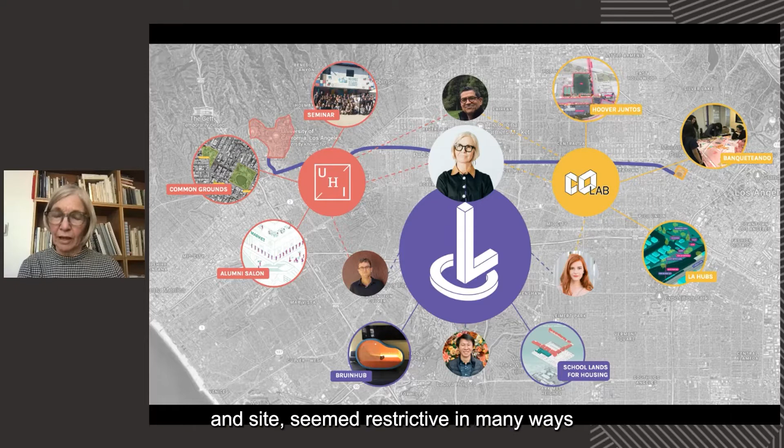After working for 15 years out of the campus lab and site, that seemed restrictive in many ways. Because we're now really deeply embedded with community-based partners, we started in 2019 something called CoLab, where we have long-term partners of various community institutions with whom we undertake our research.

I should say that all of the research cityLAB undertakes, unlike a community design center, is initiated by us as we look at what the pressing problems are that are spatially and urbanistically given, and where we really feel design can operate as a lever to explore new solutions. So all the work we do is really very much what I would call design research.

Our laboratory provides us plenty of opportunities to think about affordable housing. Just in these simple graphics and data points, you can see that California, of the 50 states in the United States, is by far the most unaffordable. More people are cost burdened by the cost of housing.

I know Australia, and Melbourne in particular, has similarly horrifying figures, but the median house price in California, the entire state, is now over $800,000, and that's twice the national level. So there's no place like California where affordable housing is as egregious a problem.

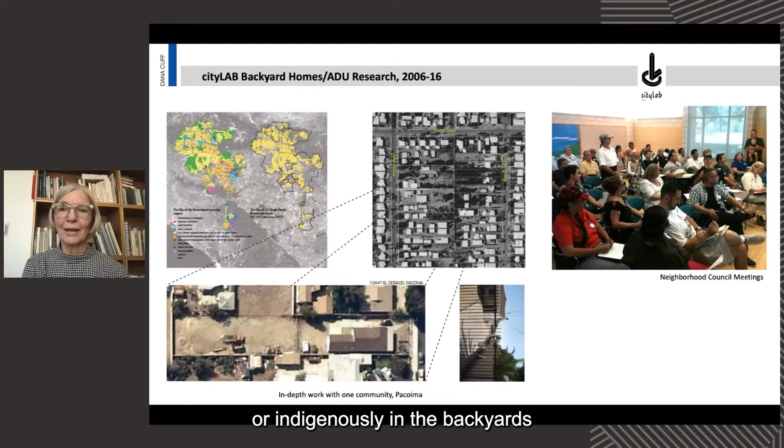So in thinking about how to provide affordable housing through new mechanisms, we realized that there was already a form of affordable housing that was occurring naturally or indigenously in the backyards across the vast residential landscape of LA.

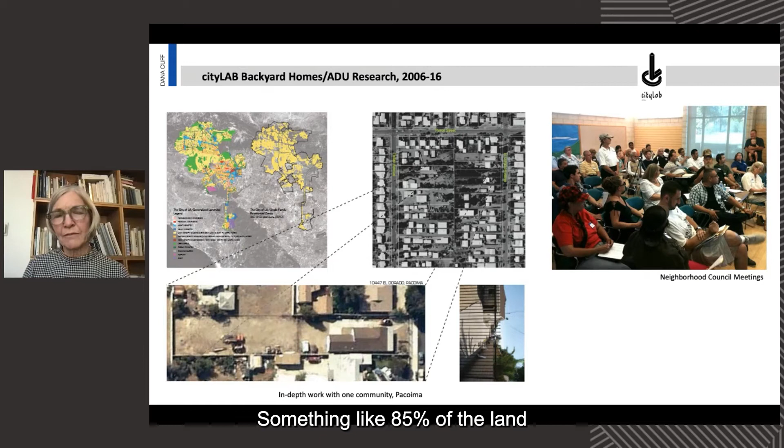You can see on this map at the left that kind of lamb chop shape going down in a small narrow band from the massive land use cluster at the top is Los Angeles, and the yellow is all residential. Something like 85% of the land in Los Angeles is residential, and most of that, by far, the lion's share, is zoned single family.

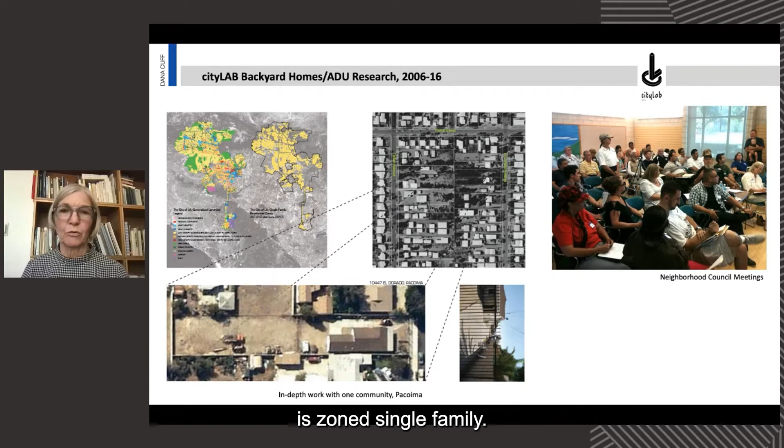So for 10 years, as the top of the slide banner indicates, we undertook a range of research projects to better understand both how this naturally occurring affordable housing was happening and what was restricting it from developing further.

It turns out that it was all illegally built, informally built, and that means that there was a huge need for it because people were placing labor into the construction of buildings that couldn't be converted necessarily into land value upon the sale of their property.

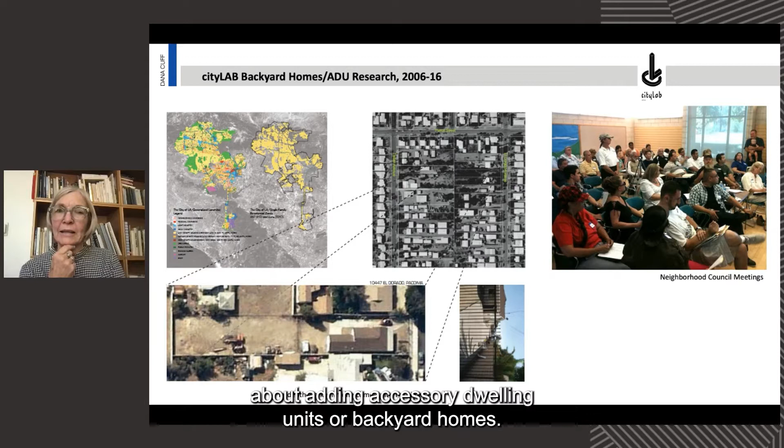You can see in this upper center slide where we began working in what we would call the low-hanging fruit, or the easiest places to begin thinking about adding accessory dwelling units or backyard homes. This is an area called Pacoima in Northeast Los Angeles County, zoned for agricultural land, and the properties there are immense—50 to 75 feet wide and as much as 350 feet deep.

You can see in this aerial that though that was originally planned for domestic agriculture or farm animals, now what's happening in the backyard is the addition of multiple units. So many of them have 3 units behind the original house.

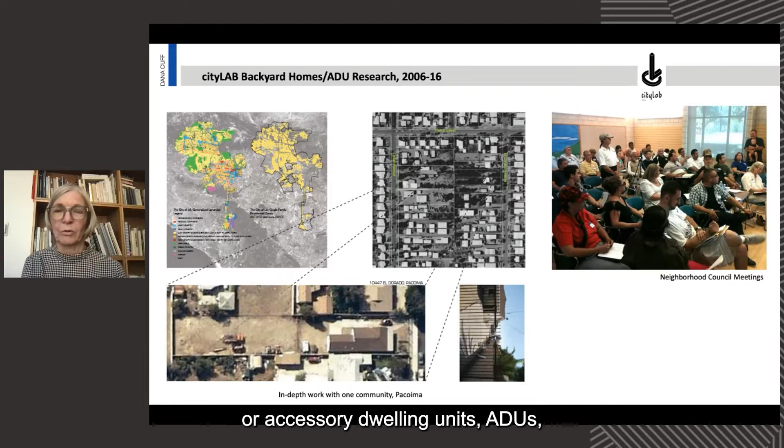We thought if we started where it was easiest to imagine adding secondary units or backyard homes or accessory dwelling units, ADUs, we might begin to unlock the DNA for the rest of the city.

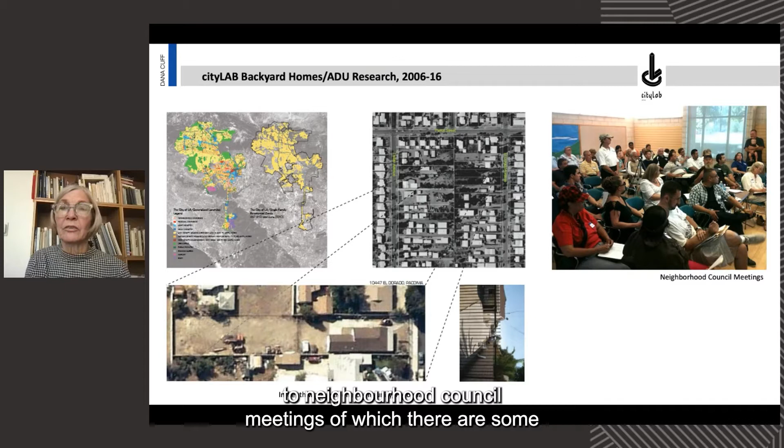Part of our research was related to neighborhood council meetings, of which there are some 100 neighborhood councils, almost all of whom vocally are unsupportive of a policy change to add secondary units, but many of whom have secondary units in their own backyards. If you're curious about that, we can talk about it in the question and answer period.

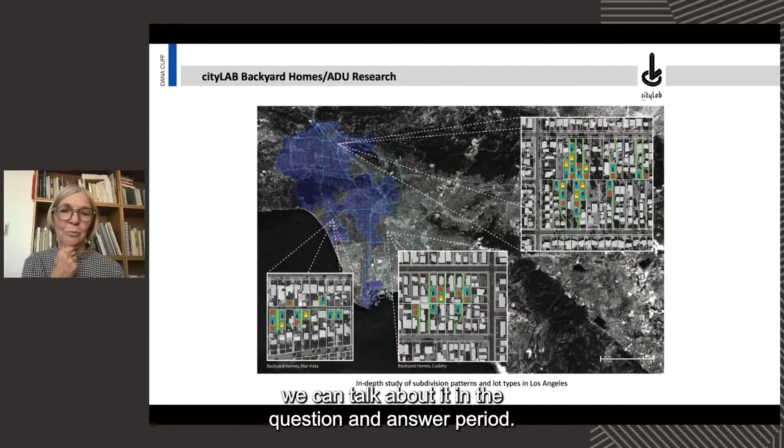One of the things we discovered was that there were lot types, property types in Los Angeles that would afford different circumstances for ADUs. There's a myth in Los Angeles, I suspect these kinds of myths exist in many cities, that there's a standard lot here. The thought is that it's a 50 by 150 foot lot. But in fact, that's not even the median lot. There is no standard lot.

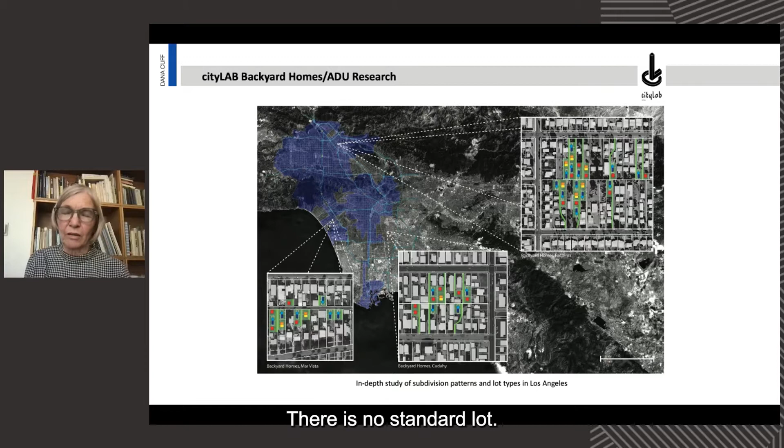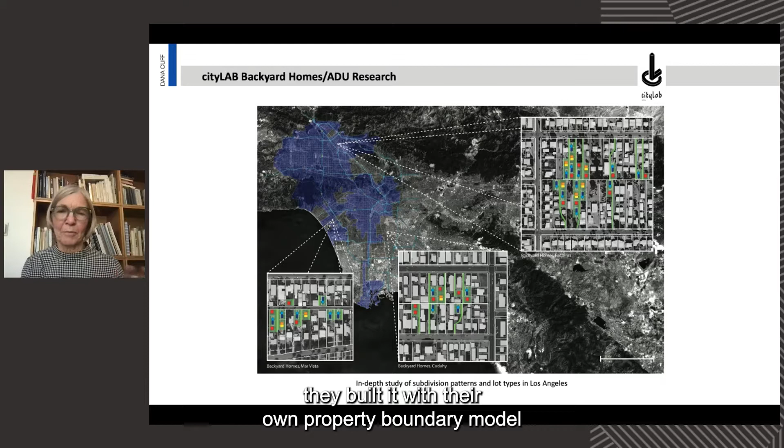It's really like a series of thumbprints, in part because as developers built the suburban fabric, they built it with their own property boundary model or pattern. And then people's additions to their houses have changed the buildable areas that remain.

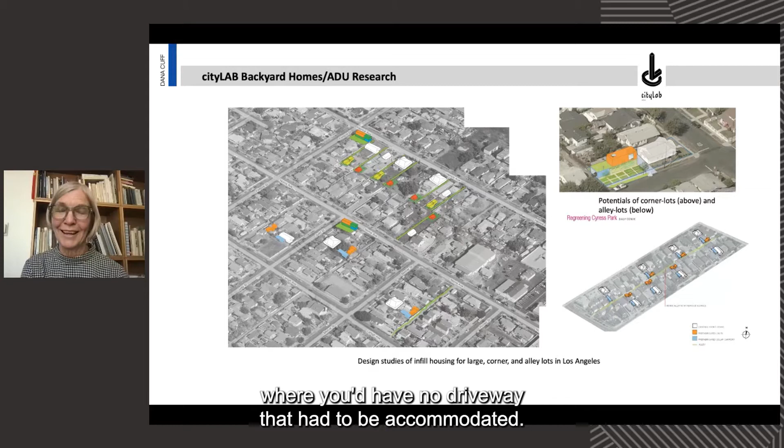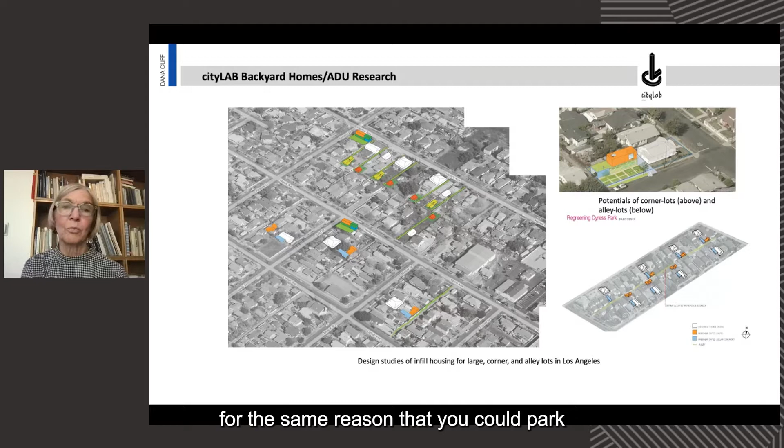So when we were working at a local level, we studied all the different types of lots where secondary units would be most easily accommodated. That was the large lot, like we saw in Pacoima, a corner lot where you'd have no driveway that had to be accommodated, so we'd have more of the lot to take up with housing rather than cars, and alley lots for the same reason, that you could park over a back garage and build a house on top. There are 900 miles of alleys, and I know almost everything there is to know about the possibilities of secondary lots, secondary houses in Los Angeles.

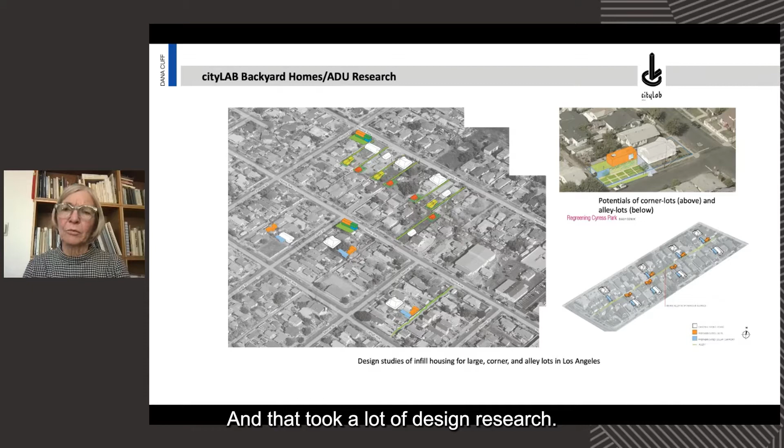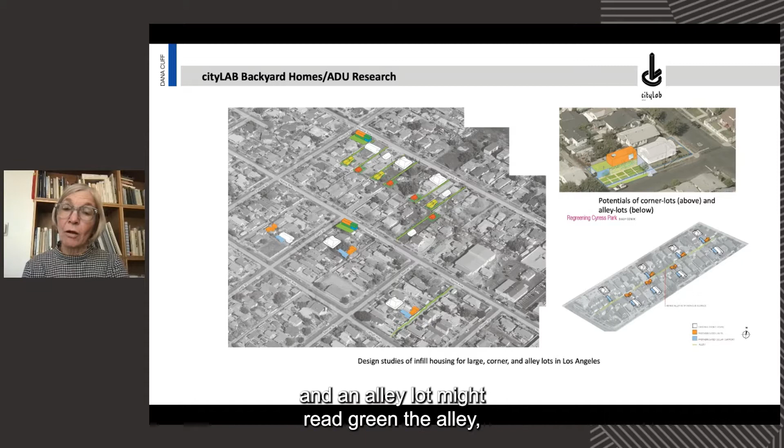That took a lot of design research. We then thought we would propose locally different kinds of secondary units that would benefit the community, that this might be a way of gaining political support from the local city council. So a corner lot might give something back, a little library, a bench, a shade tree, a plant nursery, and an alley lot might regreen the alley, make it a safer place to live, add lighting.

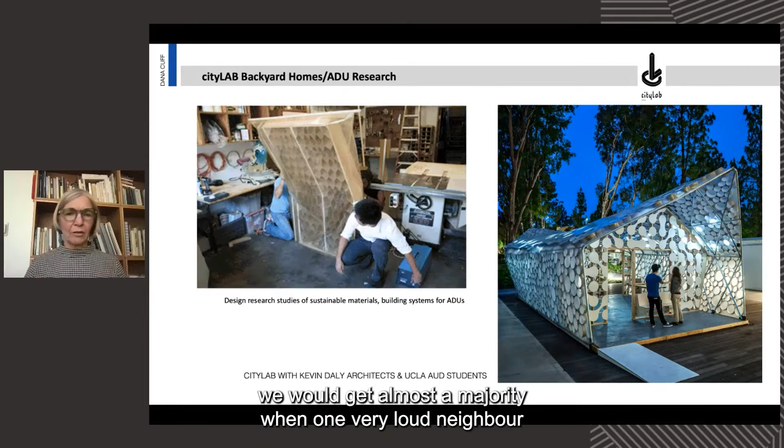At each stage, with our city council members, we would get almost a majority when one very loud neighbor in one district would come forward and convert the support into a contradiction or contrary position, and we'd lose the vote. And we never were, in 10 years, able to pass legislation locally.

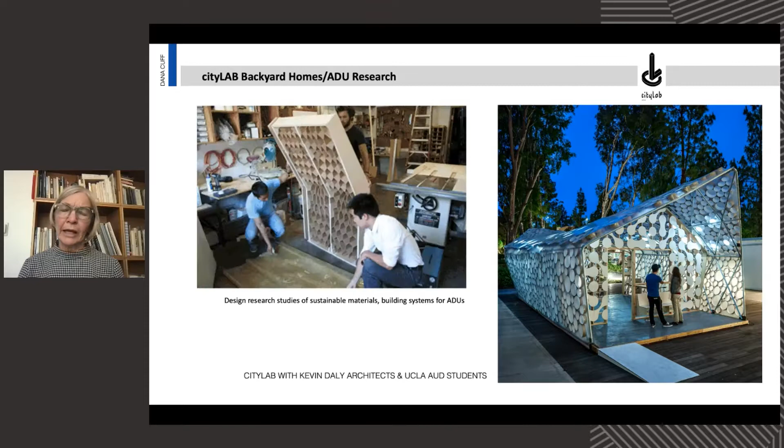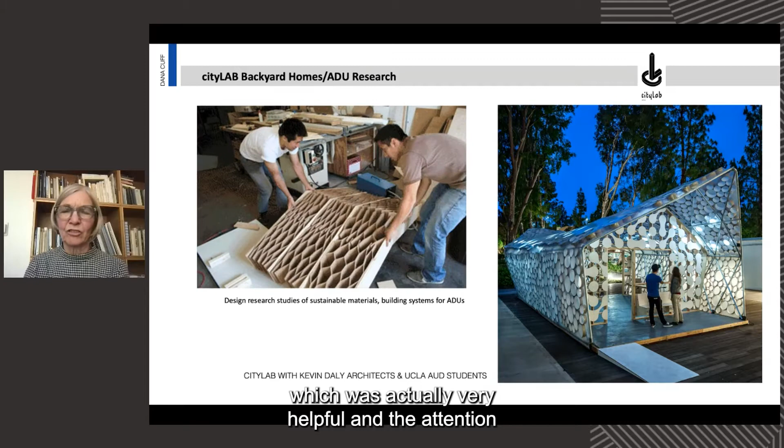This is just another instance of our design research. We were trying to build secondary units that would be highly sustainable. We built a full-scale mock-up. This was undertaken with Kevin Daly, architects, and architecture graduate students at UCLA. This got us a lot of publicity, which was actually very helpful, and the attention of our local congressman, who invited me to help co-author legislation for ADUs, accessory dwelling units, at the state level.

Knowing as much as we did basically about the Los Angeles case, I'll let this little video play for a moment since it has a soundtrack.

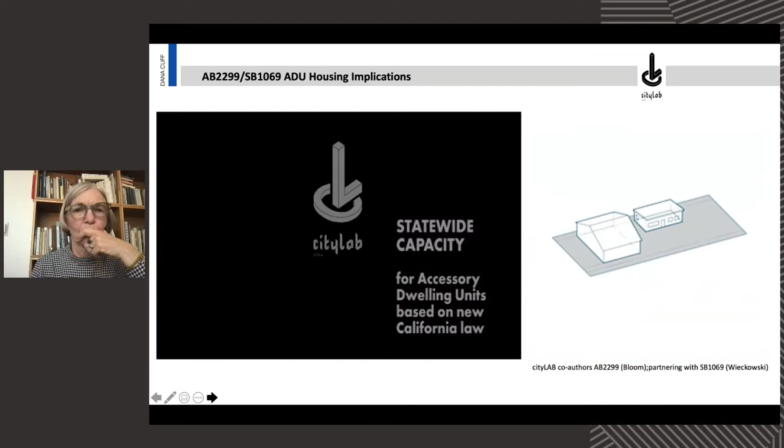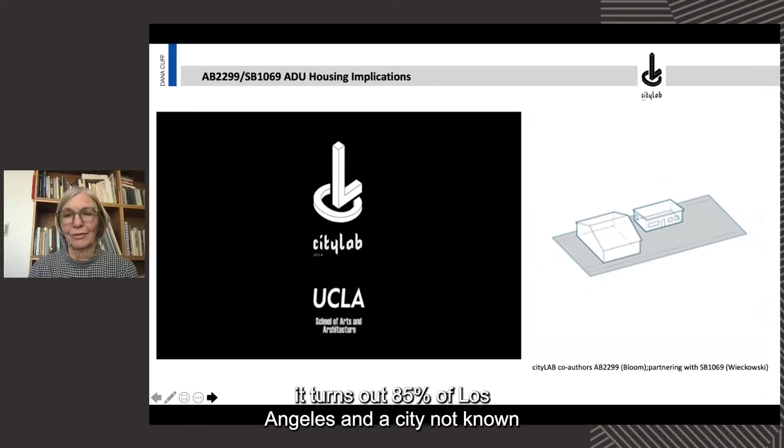We co-authored a new law, AB 2299, that at the state level incentivized rather than constrained the development of secondary units by removing parking requirements for any property within a half-mile radius of a frequent transit stop. It turns out 85% of Los Angeles, a city not known for its public transportation, is within a half-mile radius, so most properties don't need to place any parking on the site.

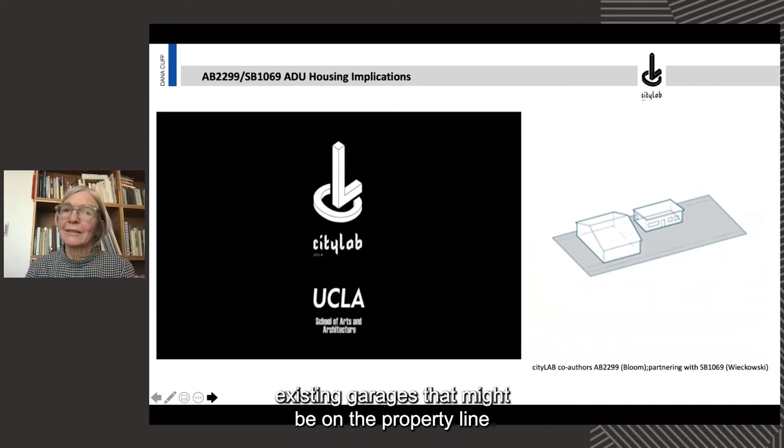Secondly, you could grandfather in existing garages that might be on the property line and build above them, so that there wasn't the need to demolish what might already be informally used as affordable housing to add new housing. All of this together made for an extremely successful bill that's had tremendous effects on the production of secondary units.

As a demonstration of cityLAB's multiple tentacles into the production of affordable housing, we discovered that even planning departments didn't understand how to apply the new legislation during the first year. So we also wrote a guidebook that's been published over and over online and in hard copy to help both planning departments and homeowners figure out how to build an ADU, because there still are kind of arcane legislative components.

We found in further research that 55% of those ADUs that are built are rented below market rate, so there is a good contribution to affordability. You can see from the chart on the left, when the law was written, there was a very restrictive law that was on the books prior to 2016. In the very first year that the law made ADUs legal under our new guidelines, in California, 5,000 permits were issued.

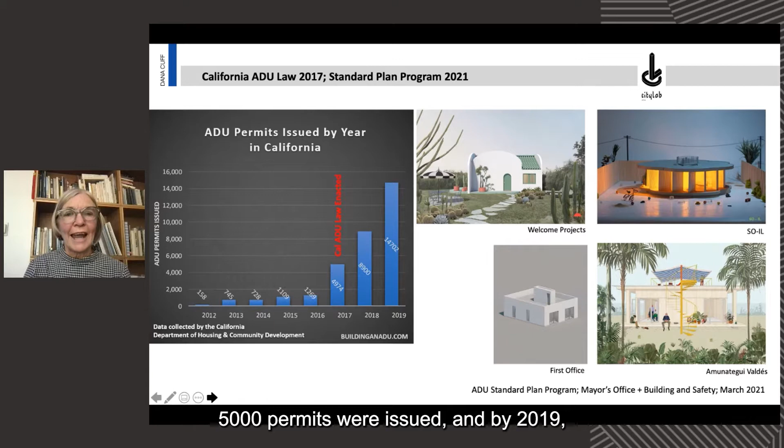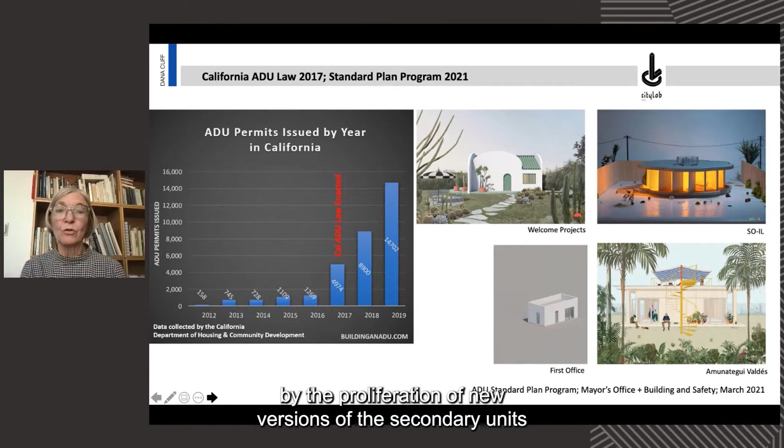And by 2019, that number had almost tripled. In some ways, I'm actually even more pleased by the proliferation of new versions of the secondary units, or backyard homes, that has occurred since the ADU law we co-authored passed.

One of those is something called the Standard Plan Program that the Los Angeles Mayor's Office issued. It was something we looked at extensively during our 10 years of research: could we develop a set of secondary unit plans that could be pre-approved by the Building and Safety Department, reducing the cost to homeowners and the timeline, which is a large part of the cost of building a housing unit? The mayor's office invited 15 architects initially to submit plans, which the building department approved.

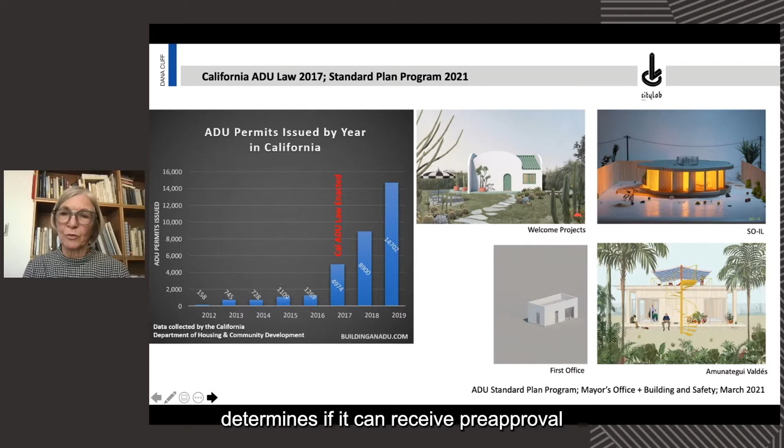I'm just showing you 4 of those. Now any architect who is interested can submit a plan to the Standard Plan Program. The building department reviews it, determines if it can receive pre-approval, and it's accessible to homeowners who might like to try a version, which would have to be tailored to their own backyards.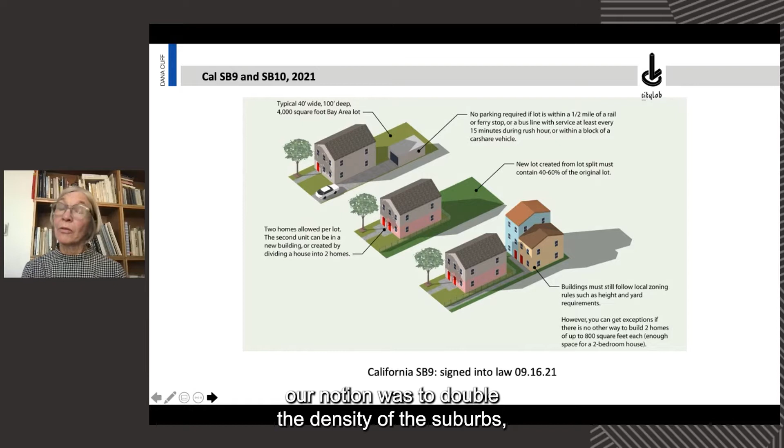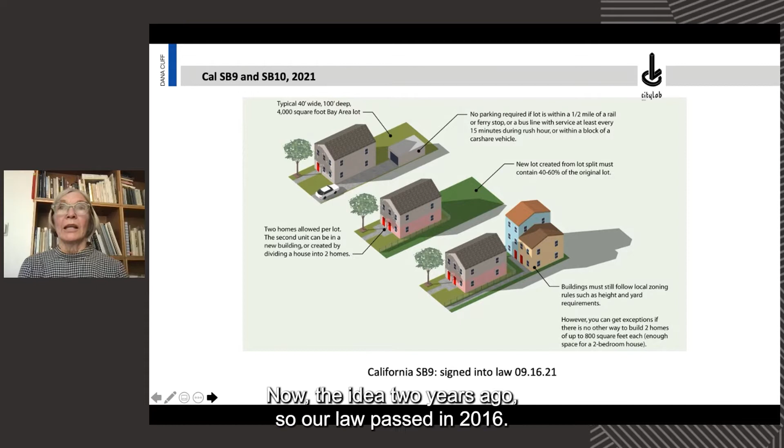Another, even more exciting aspect of the ADU law is that our notion was to double the density of the suburbs, which when we started talking about that in 2006, was a kind of heresy in Los Angeles. Now, the idea—2 years ago, our law passed in 2016, it became law January 1st, 2017.

By 2019, you could have another unit on the site with a revision to our law that introduced something called a junior ADU. In other words, you could carve a small unit out of an existing house in addition to adding a new accessory dwelling unit. So you could actually have 3 units on the site.

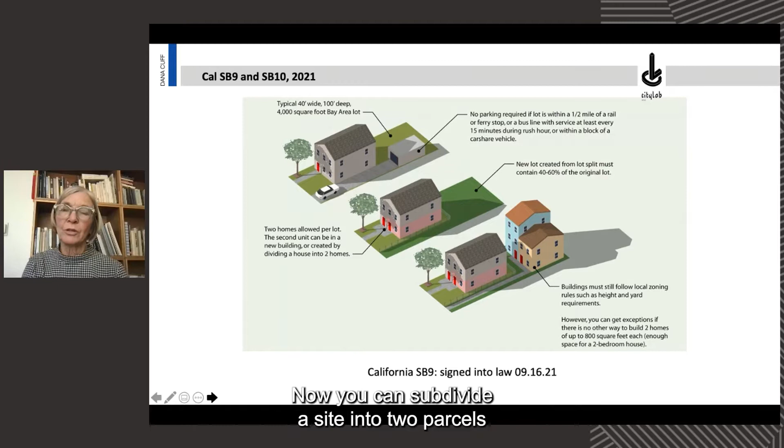Just passed in September, a little over a month and a half ago, was new state legislation that allows 4 units per site. And while the ADU law was only for rental, now you can subdivide a site into 2 parcels, and each of those parcels can have a secondary unit.

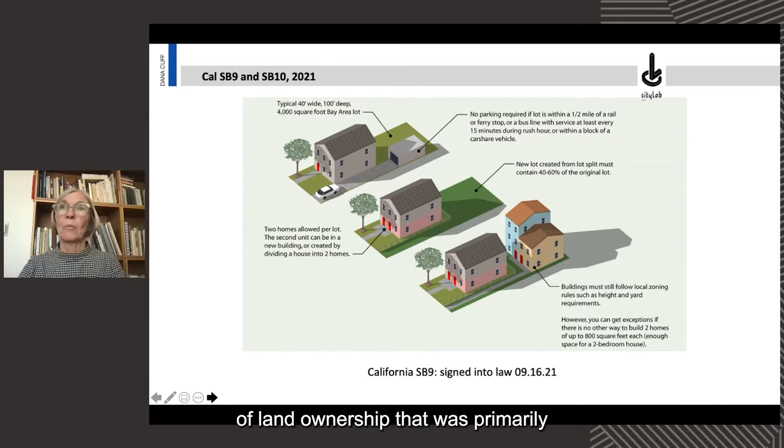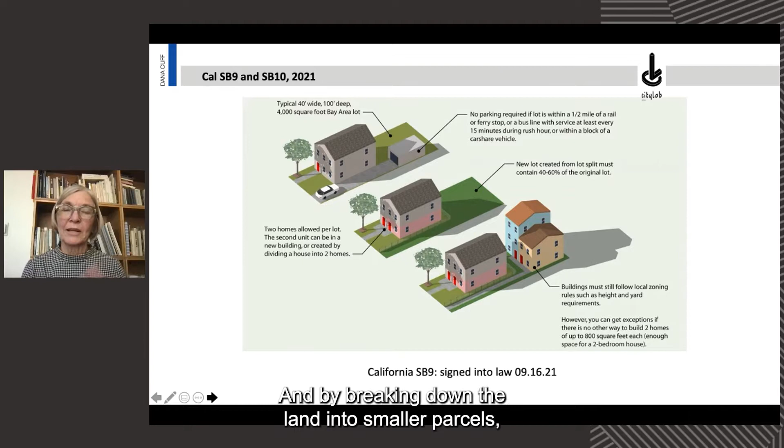In some ways, this is addressing what we in the United States have come to understand as the racial injustice that's baked into the suburban land pattern of land ownership, which was primarily directed toward white early homeowners and persists in the way zoning operates. By breaking down the land into smaller parcels, we open that land to more economic groups, and by virtue of the connections between race and economics, more racial groups.

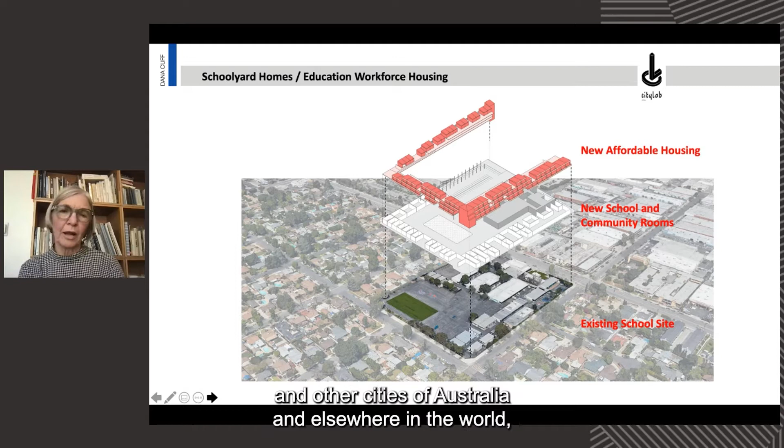cityLAB continues to see how we might develop affordable housing in the suburban land patterns that we find across the United States, and also outside of Melbourne and other cities of Australia and elsewhere in the world.

Because we couldn't guarantee affordability in the ADU law, since each housing unit would be built by the homeowner, we started looking for publicly held land where we could ensure that the housing built there could be controlled for affordability and for households in need.

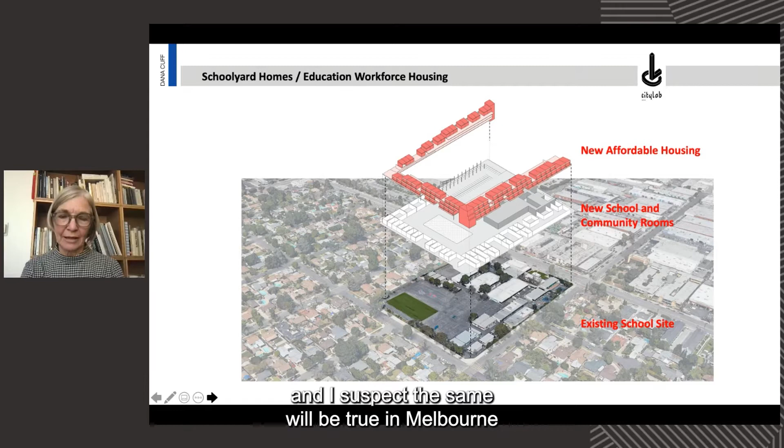And the most obvious site for that, and I suspect the same will be true in Melbourne and other Western cities, is the schoolyard. In California, we have almost 11,000 school properties, and in every county, our research over the past year has shown there are properties potentially developable for affordable housing.

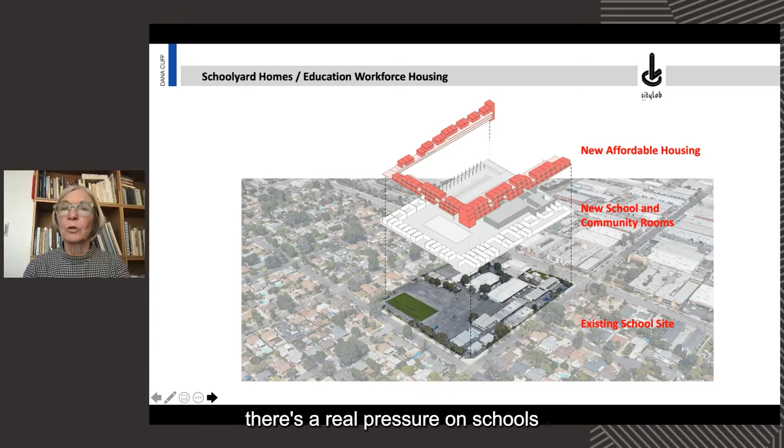Since starting teachers in California rarely can afford to live in their districts if they're in an urban district, there's real pressure on schools to build housing for their workforce. We've been studying some 46 districts trying to build what we're calling education workforce housing. Only 4 developments have actually happened so far. We've just finished a significant report and handbook that will now be the basis for developing new policies to enable schoolyard housing, or education workforce housing, across the entire state.

This is the most recent conceptual project we've undertaken, again focusing on spatial justice and affordable housing as the primary means through which architectural research can begin to address injustices. We're looking at the future of housing and community development in the whole state of California in a statewide run program.

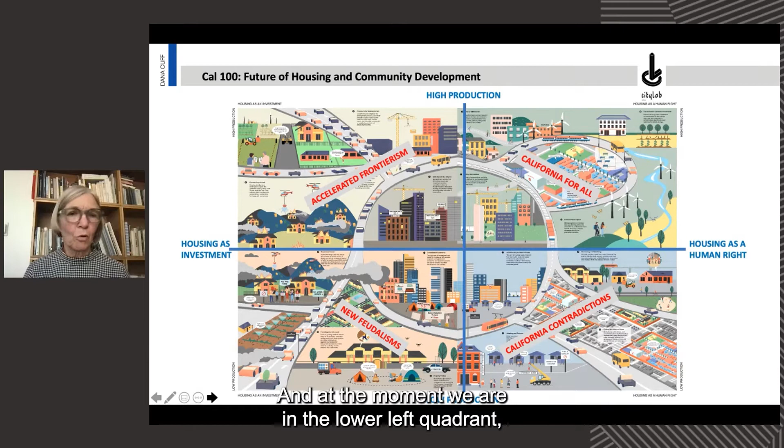We're trying to see if we think of housing on one dimension as a human right or as an investment, which you see on the x-axis, and on the y-axis, housing that we're producing a lot of, or almost none of. At the moment, we are in the lower left quadrant, which we're calling new feudalisms: low production and housing as investment.

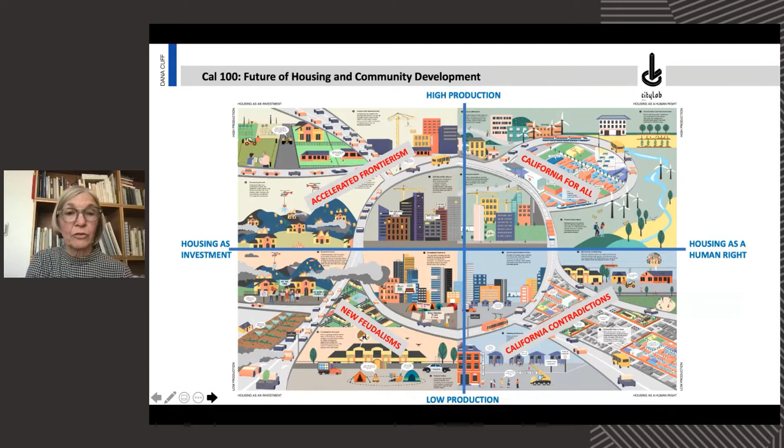Which is a kind of dystopic view that's characterized by the way our cities in California, across the United States, and across much of Europe look today—with a large homeless population and luxury housing being built at the same time, with a great deal of protectionism happening in the suburbs as they watch new forms of density being proposed there.

In the upper right quadrant, where we have high production and housing as a human right, there's a sense that we can create a state in which all members of our population will be able to live decent and dignified lives with permanent supportive housing.

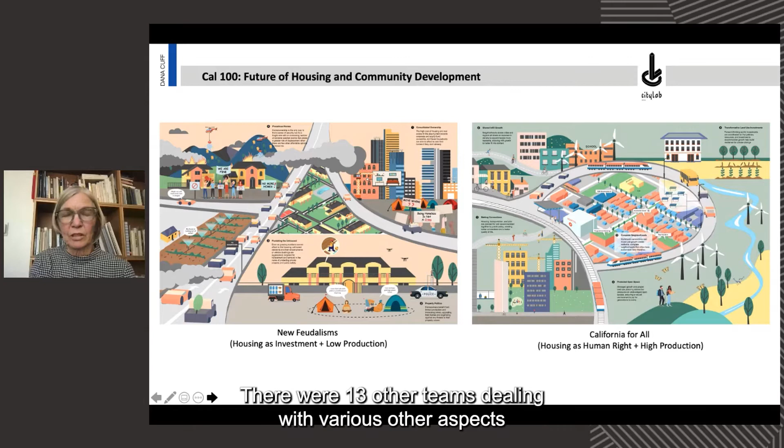So you can see this is now becoming part of a state-generated document with these different scenarios laid out here. Our work was on housing and community development. There were 13 other teams dealing with various other aspects of planning in the state of California.

So thank you very much.

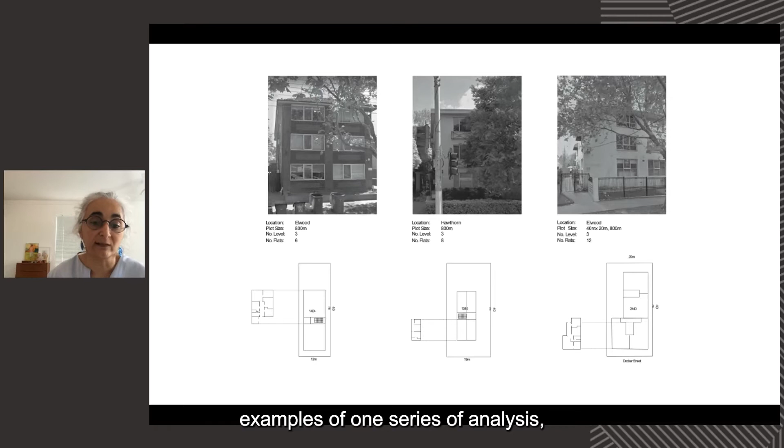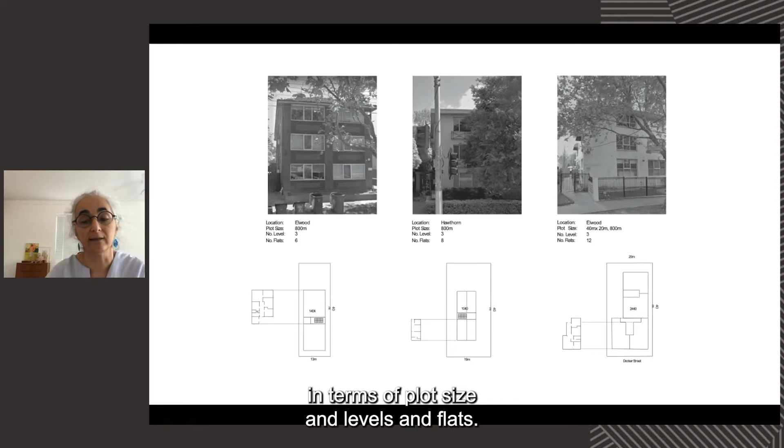I'm showing examples of one series of analysis on walk-up apartment blocks, documenting plot size, levels and flats. These studies were repeated across other housing types, like brick veneer houses, with a similar set of documentation. As a group, this led to a fairly comprehensive, detailed documentation and analysis of these building types, with students looking at common family resemblances across the genealogy and commonalities, which could inform strategies for at-scale adaptation.

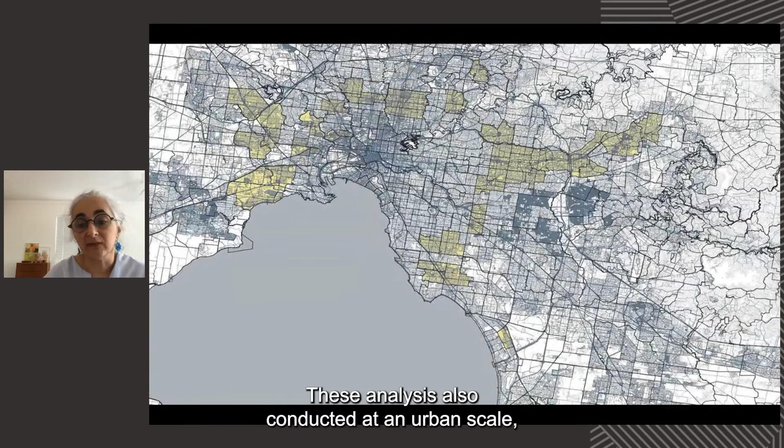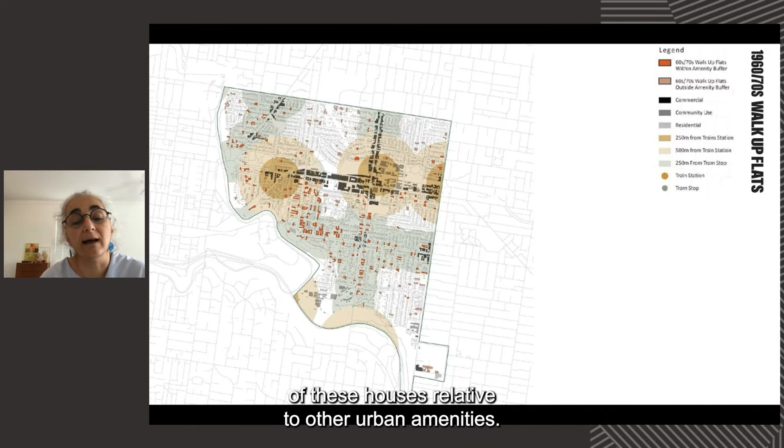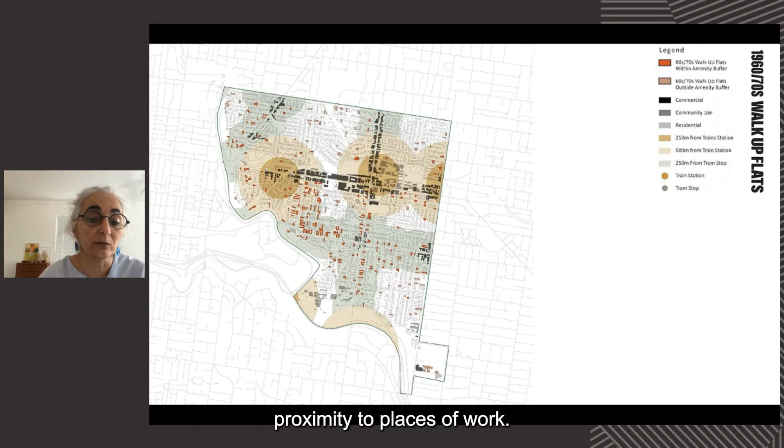These analyses were also conducted at an urban scale, where students looked at the proliferation of these housing types across Melbourne suburbs, building an argument for at-scale adaptation. These urban studies included mapping houses relative to other urban amenities, like outdoor spaces, transport, and proximity to places of work. The studies were interesting because students started developing predictions and recommendations about which Melbourne suburbs particularly suited people with disability—not so much based on the home environment itself, but its proximity to other urban amenities.

From this early analytical stage, we moved on to case study design projects, where the students worked with specific examples of these housing types, looking at spaces and elements that they could revise, adapt, or add in order to modify these houses.

This design work was very much tied to the earlier typological investigations, where students had prepared detailed descriptions of the buildings' features, their challenges in terms of accessibility, and opportunities for adaptation.

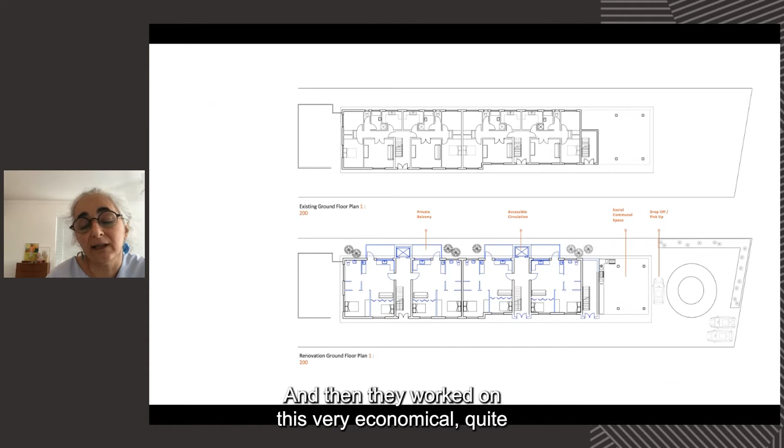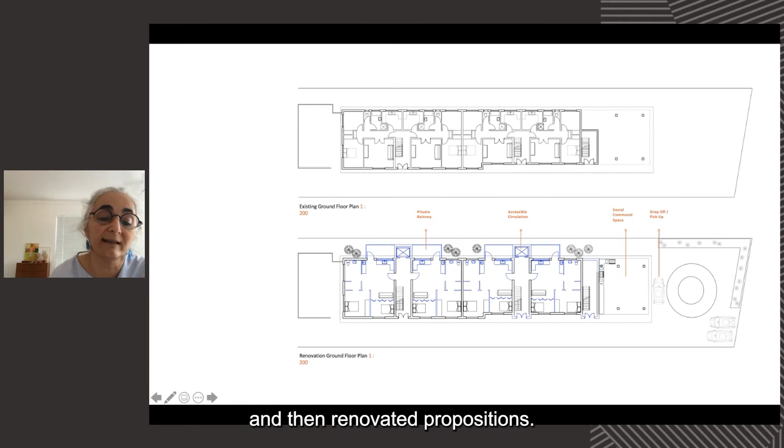They then worked on economical, concise propositions for adapting these homes, working in terms of existing versus renovated proposals. In the bottom drawing, we're looking at the incorporation of a lift to allow vertical circulation.

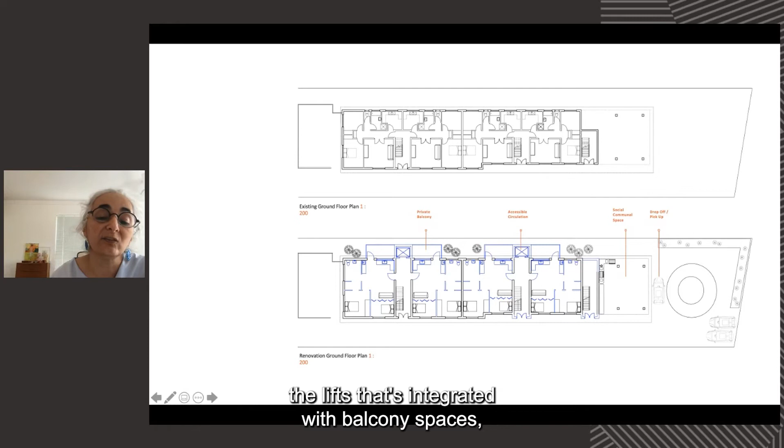These propositions were always developed in context of other opportunities to add amenity to the dwelling. In this instance, the lift is integrated with balcony spaces, adding substantial amenity to the individual apartments.

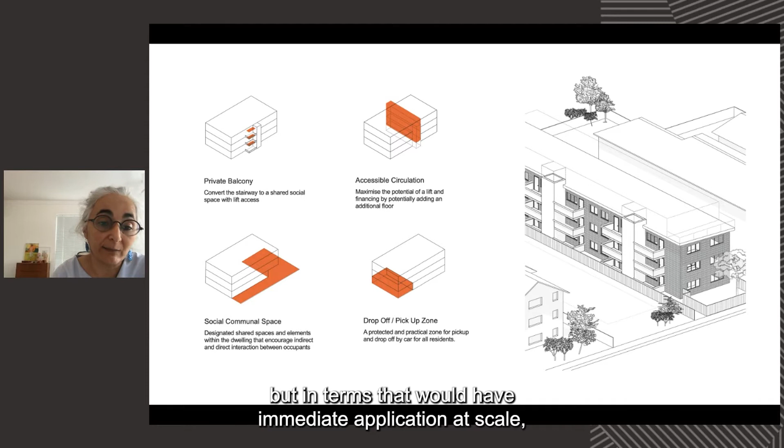This manner of working was developed into a series of recommended strategies, communicated in fairly abstract terms but with immediate application at scale — strategies we thought could be applied beyond that specific case, across the building type.

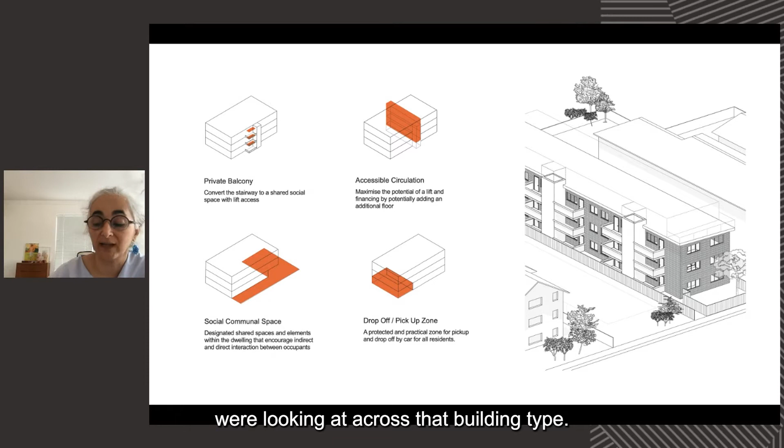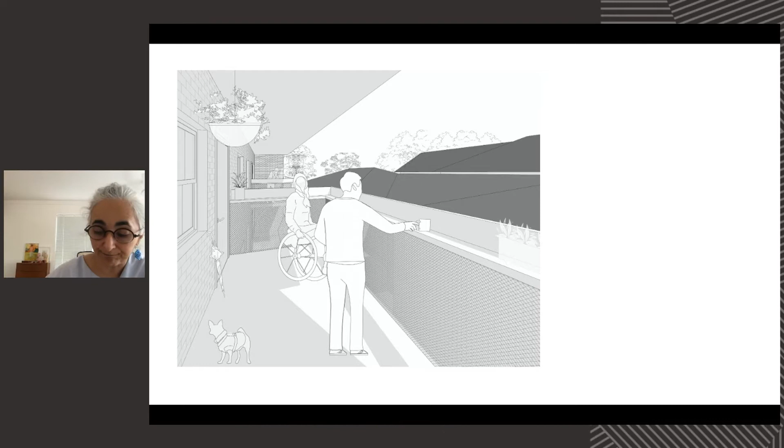These strategies were tested for their formal implications and visualized through new spatial propositions, such as new balcony spaces adjacent to the lifts. Students worked in groups across building types, focusing on the particular features of different dwellings.

For the garage house, the focus was very much on the garage component, looking at what converting a two-car garage space to a one-car garage space would enable.

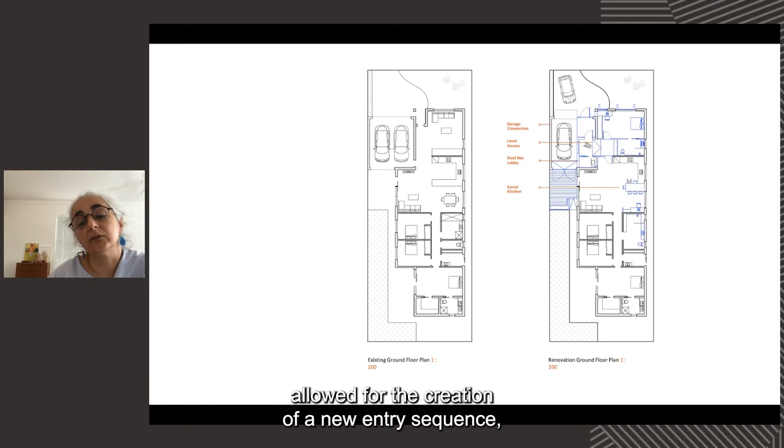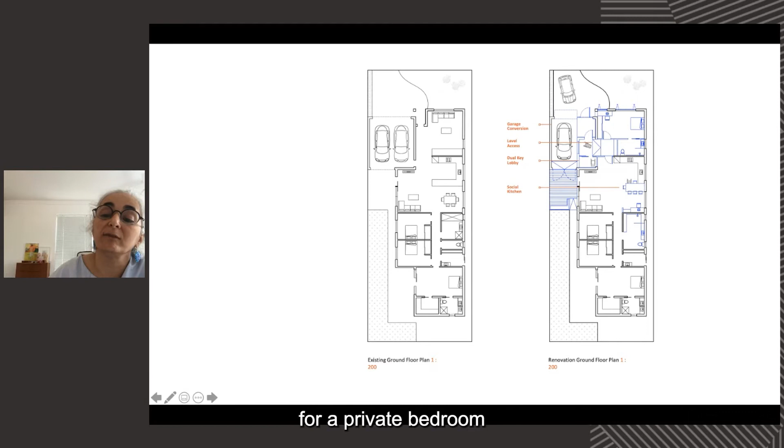The garage conversion allowed for the creation of a new entry sequence that resolved and enabled level access, and allowed dual-key access within the dwelling for a private, fully accessible bedroom and bathing facility.

The focus was on these discrete but impactful alterations, conceived very much in the context of specific building types. What was interesting is that some student work started to look closely at individual elements of these dwellings.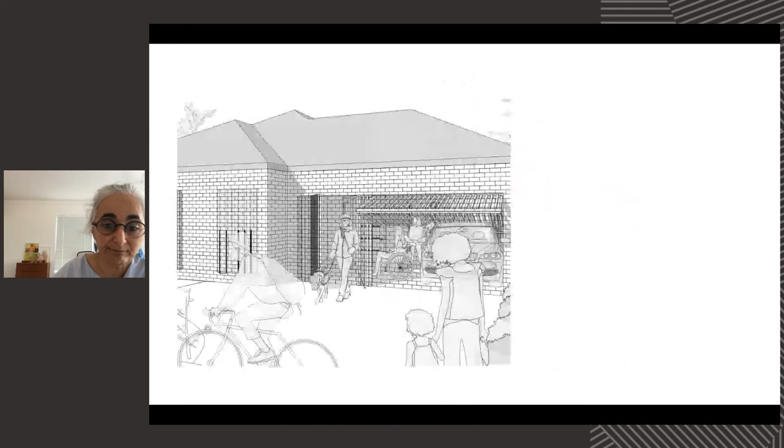Some of the student work really started to look at elements of these dwellings, such as the garage door, rethinking the compositional structure of these elements.

The garage door in this instance was converted into an element with multiple openings — a front door as well as fold-up screens — showing that through renovating just that one architectural element, the potential of the garage to serve multiple purposes was unlocked.

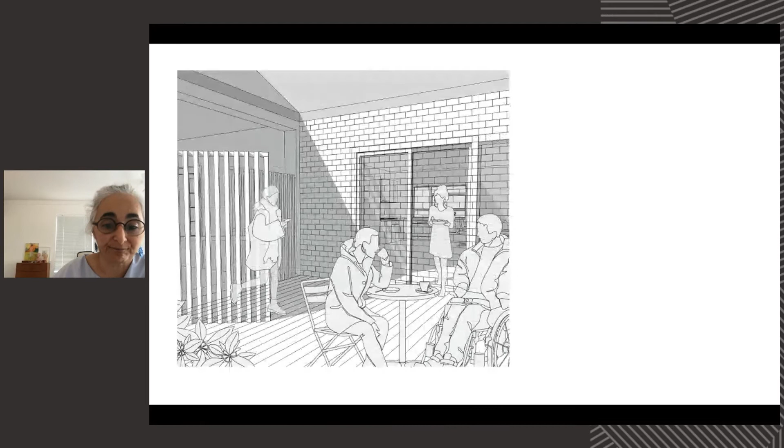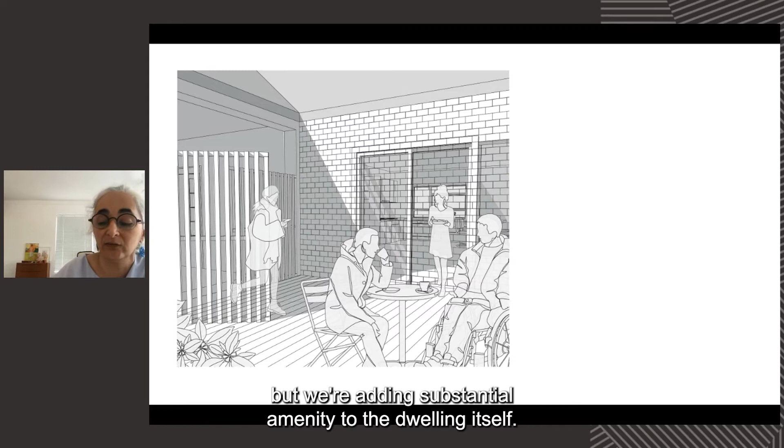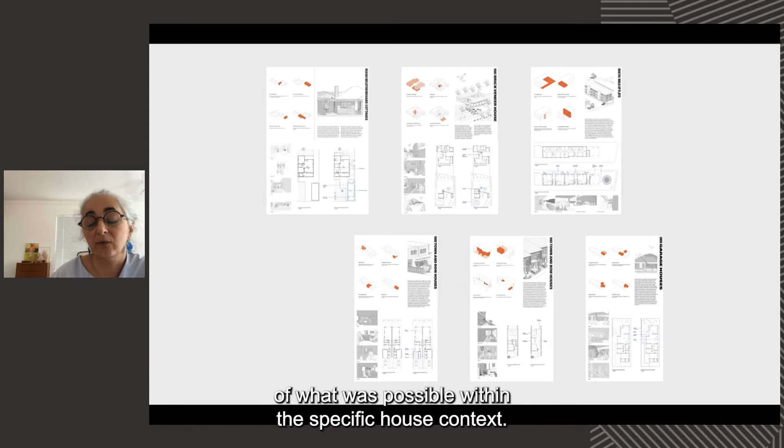We had a comprehensive set of recommendations, communicated as how-to guides of what was possible within specific house contexts. One discovery in this process was that there were common elements — the entry, foyer, kitchen, and so on.

Students found that working on these common elements was really necessary for resolving accessibility issues in these houses, but also for improving the qualities of the houses in all sorts of other ways. So we moved on to collate the different ways a garage had been adapted across these various projects, and to name these.

For example, the half garage and high-amenity garage door examples I just showed you in context of the garage house. This naming process was really helpful because it started to link strategies initially conceived in terms of accessibility to larger qualitative ambitions.

These ambitions included issues of sociability, safety, and architectural performance.

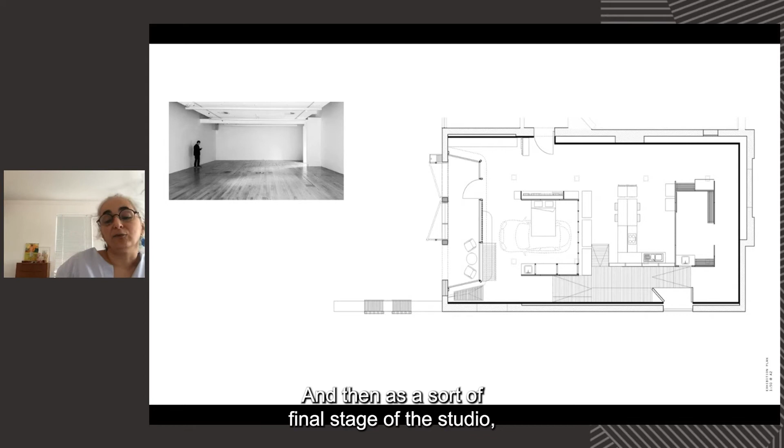By capturing this across the different spatial units, we started to develop a kind of kit of parts at the level of strategy, where one could select the most appropriate elements depending on the situation and condition of the individual house.

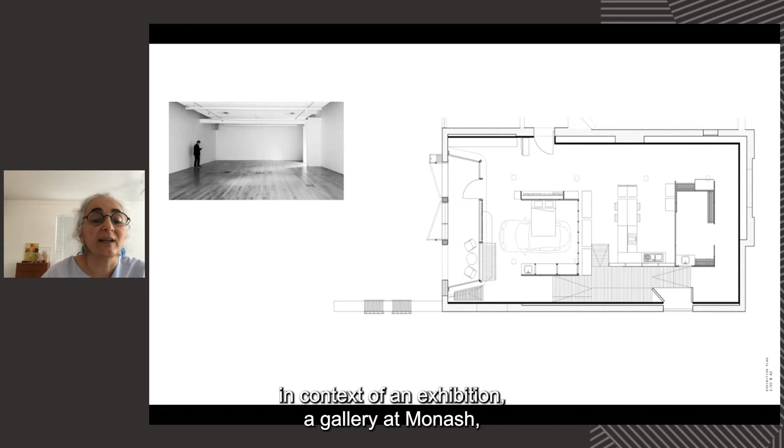As a final stage of the studio, we were keen to test some of these strategies at one-to-one scale through material testing. This was done by working with students to communicate the results of the studio through an exhibition in our gallery at Monash, the MADA Gallery, shown in the image on the left.

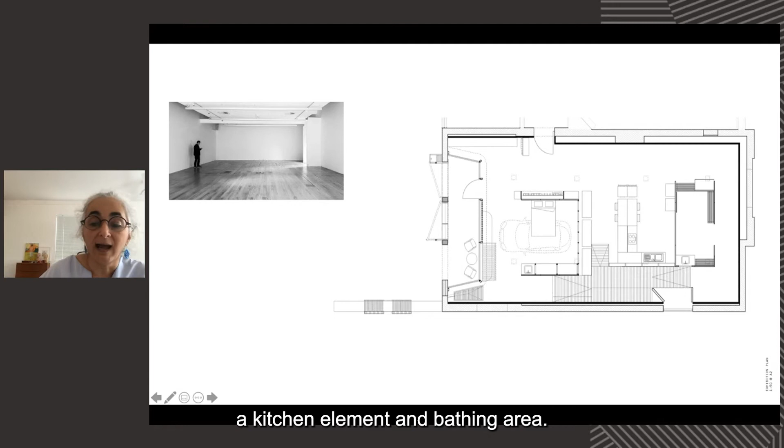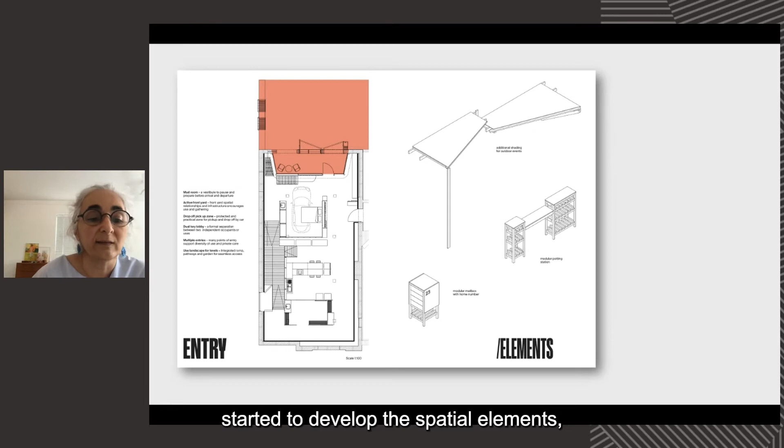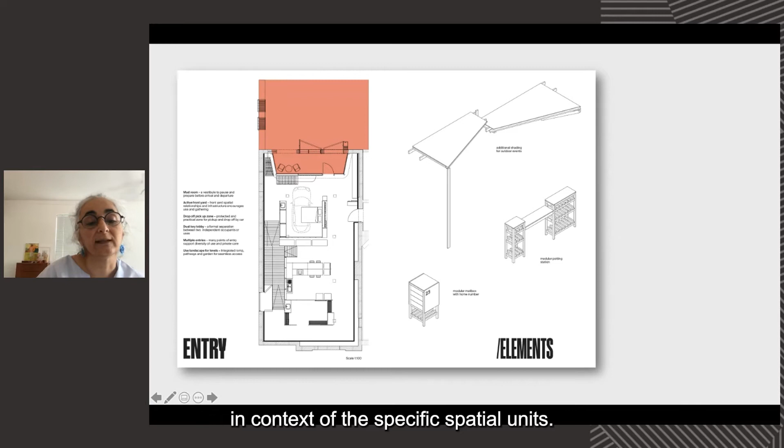So you'll see here that we're starting to work from the level of strategy in the context of specific spatial units, and then a series of infrastructure and furniture elements that were very much designed as modular units that could be chopped and changed depending on the specific environment.

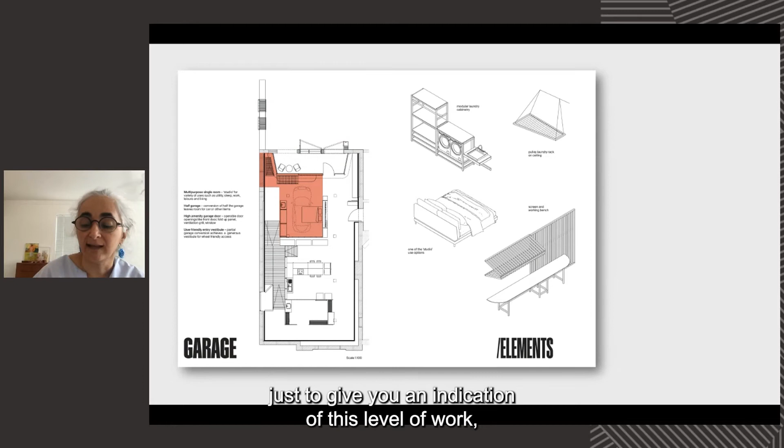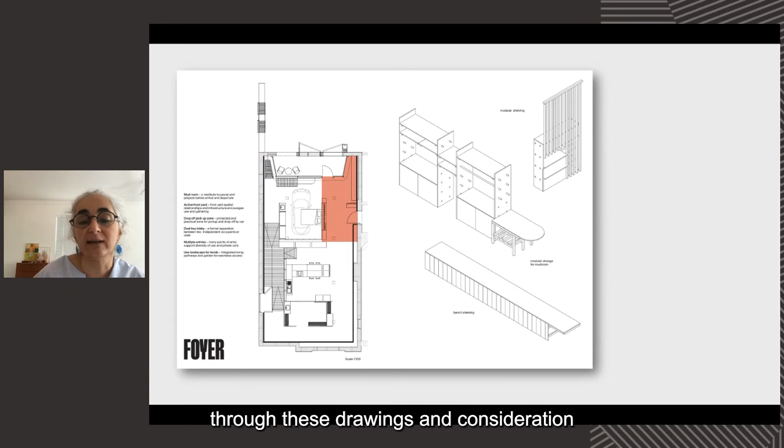I'm just going to step you through this quite quickly to give you an indication of this level of work, where you start to see, for example, the garage door element reappear, now being tested through these drawings with consideration of their fabrication, and the kitchen and bathroom and so on.

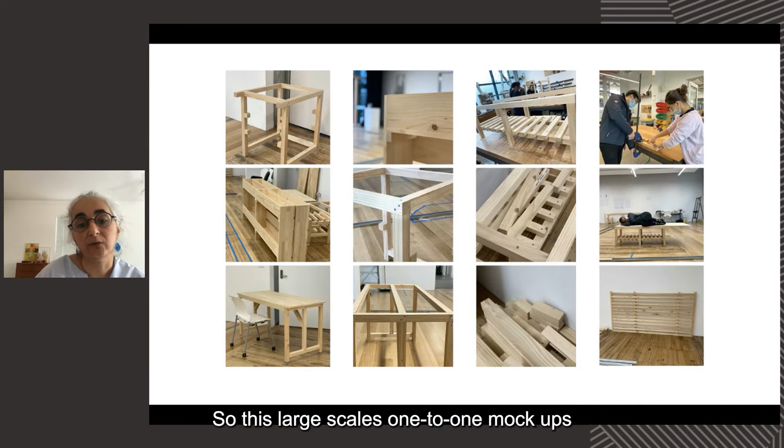So the students then worked on these elements primarily with timber, producing large scale one-to-one mock-ups that they would then test in the context of the gallery environment.

This was the final stage of the studio, and we had aimed to have the exhibition earlier this year, but it's been interrupted a couple of times by the lockdowns. We're very much hoping to bring all these elements back together for an exhibition in March, which will be included in the Melbourne Design Week.

So the material I've drawn together in this presentation is very much from the pamphlets and catalogues designed for this exhibition. They're seen as how-to guides for the renovation of our suburbs, aiming for accessible and better quality homes for everyone. Thanks very much.

Thank you, Maryam, fantastic work. I'm very much looking forward to the exhibition. We might bring Dana into the room as well. Hi, Dana. Thank you. Hi.